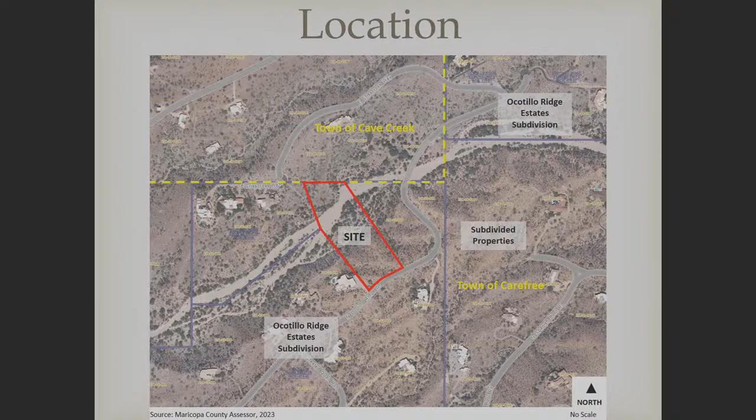So as you can see, this is in our Highlands area, Ocotillo Ridge Estates. You can see the property actually borders the town of Carefree, sorry, the town of Cave Creek is in Carefree. As you can see, a major feature on the property is the floodway, and you can see it has a bit of a floodplain to it. It occupies, I would say, more than half the lot.

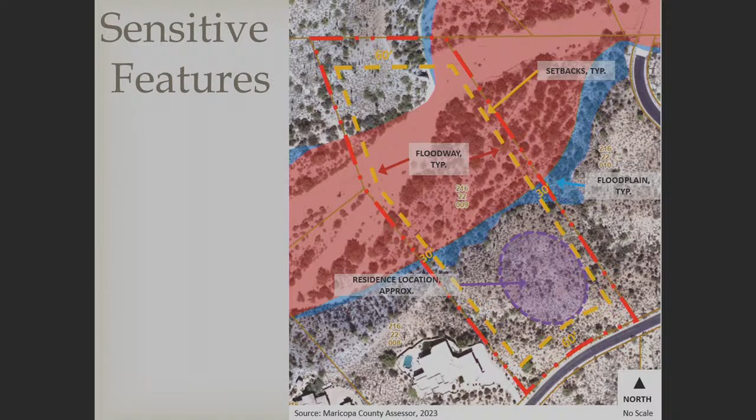You know, you see our setbacks. You can see I gave an approximate location of where the development will occur. It also ties to an existing plat, so it has a very specific location, which can sometimes be a challenge, but I think a lot of plats design those building envelopes understanding the developability of a property. So it coincides basically with our development standards.

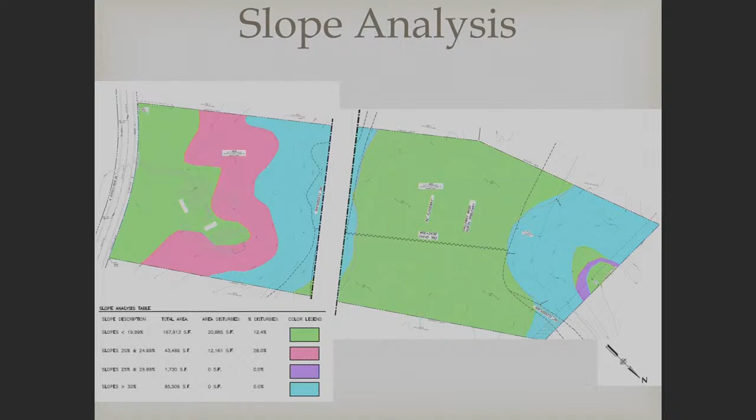So this is, as you can see, the slope analysis. The most level portion of the property to develop on is up close to the street where the building envelope exists, and then it sort of drops off down to the wash area.

Regarding our development standards, of course I wrote rural 70, it's rural 190. The lot coverage meets the requirement, less than half. The disturbed area, again, probably due to the fact that there is a significant wash, we're only looking to develop 11.8% of the property, which also includes the septic area.

Complies with our setbacks, as I mentioned, both zoning and plat. The cumulative height, I think because this home is sort of a low profile design, and probably also because it's on a relatively narrow, level area of the property, our cumulative height requirement is 27, almost 28 feet, with an overall building height of a little more than 17 feet.

All of our grading and drainage, which is reviewed by our town engineer, meets our development standards, specifically the cut to fill ratio. And utilities, we can say hooray, it's served by Carefree Water today, and as I mentioned, a private septic system will be on site.

Understanding our development review board purview, architecturally speaking, it's desert hues. Again, the low profile architectural style is in harmony with the intent of the zoning ordinance. There will be native landscaping and revegetation at the disturbed areas, and this falls into our mountainside review based on the fact that there is a significant wash with steep slopes, and it also has our protected vegetation.

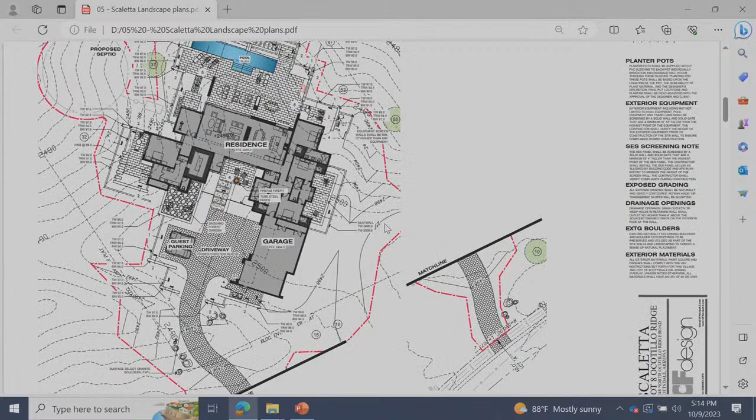Chairman: Can I ask, what is the red line around the site? That's the building envelope, the limits of construction, the total limits of construction. The building envelope seems to be a black dashed line. Right. So the plat building envelope is the black dashed line, and the limits of construction is the red.

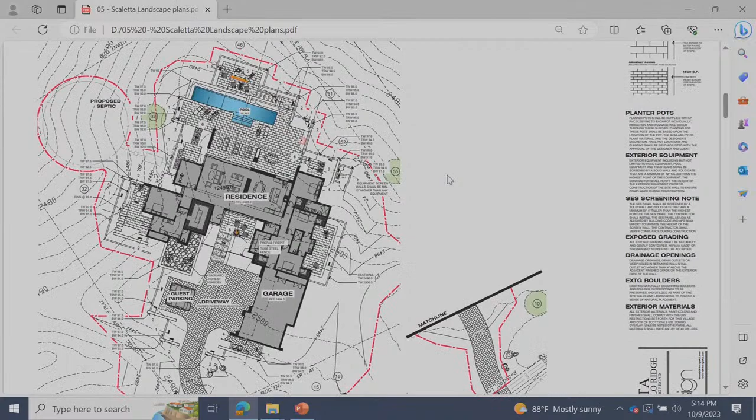And the only reason it's coming out so far is because we need to do a little bit of grading in order to get water around the house. Question: Just a quick question about the floodplain, none of the residence is in the floodplain? No, none of the residence is in the floodplain.

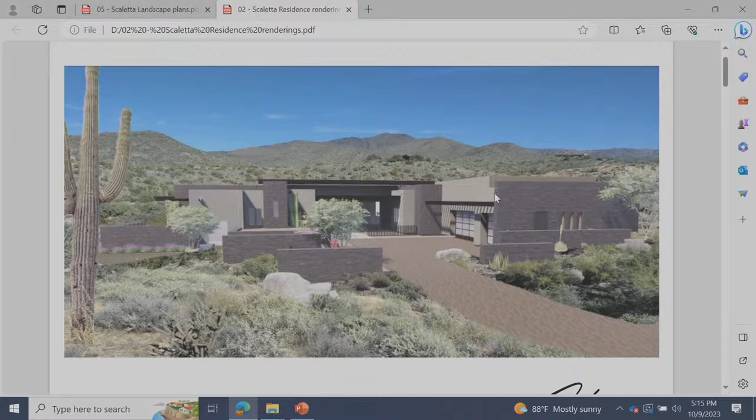I'd like to pull up the renderings. So as you can see, we're going with desert contemporary, natural stone and stucco, darker stone, kind of a warm gray stucco color with metal trim and detailing, and deep patio overhangs.

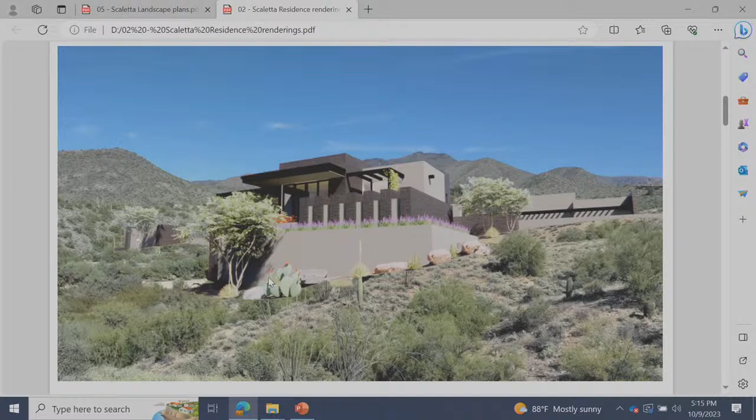This is where we have the most exposure, on the master suite side, and we're using some trellising walls in order to step down and not have those walls feel very massive.

Again, just trying to keep going with the land and terrace very gently. So you probably won't be able to really see the house wall from the street because of the screening desert landscaping, but if you could, this would be the view as you are driving west, with the garage here and the stone wall.

That's an awful large Ocotillo, I guess. My Photoshop just would not reduce it. I tried, that's like 100 feet tall. Yeah, pretty healthy looking. I tried to get it down, it didn't work.

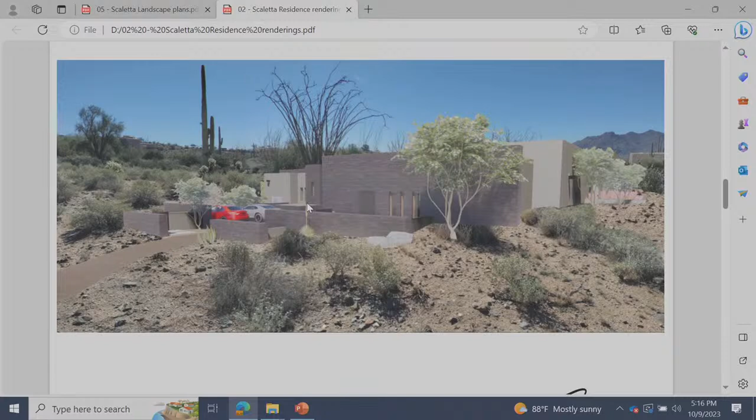The view, aerial view now from the southwest corner of the house. So master suite, master patio, stone screening walls, and the terraced wall stepping down. And the land slopes up pretty steeply up to here.

And then we have the auto court, which is down actually from natural elevation at this point, about 5 feet. We'll be reducing it in order to, again, maintain that low profile, keep our even cut fill, because we don't want to perch too high.

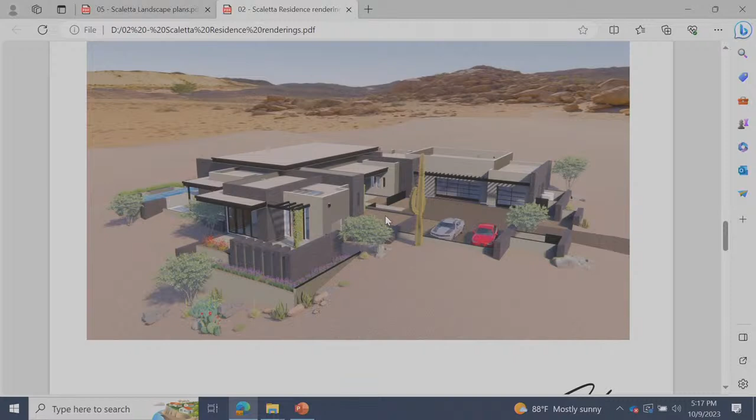If we come in on natural grade, we're going to perch too high on the other end, which we definitely do not want to do. So master suite, you can see the garages from here.

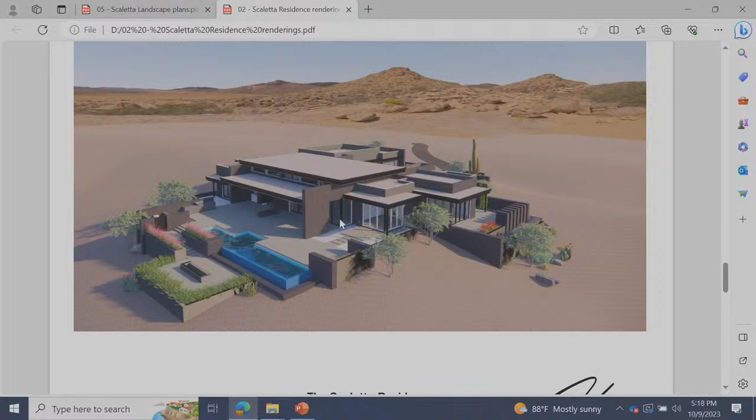Over on this side, we're now looking from the southwest side, or the northwest side, excuse me. Exercise room and patio, master suite, family room. You can see again the really large overhangs providing shade to all that glass.

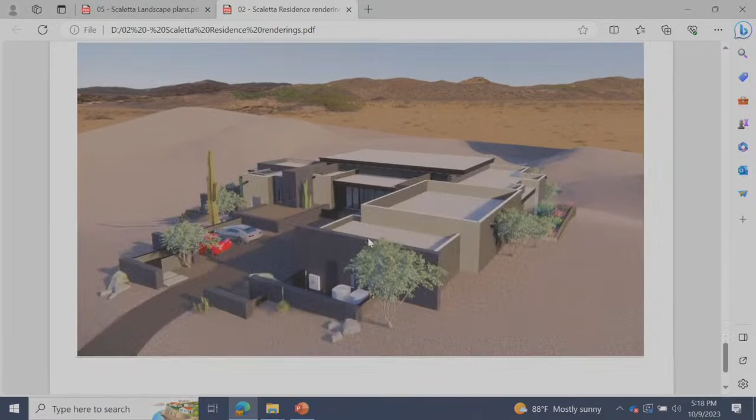Coming around, this view offers you a good view of how the patios are going to work for the backyard. And if I'm going too fast, just ask me to back up, please. And then the garage side, so this is the guest wing.

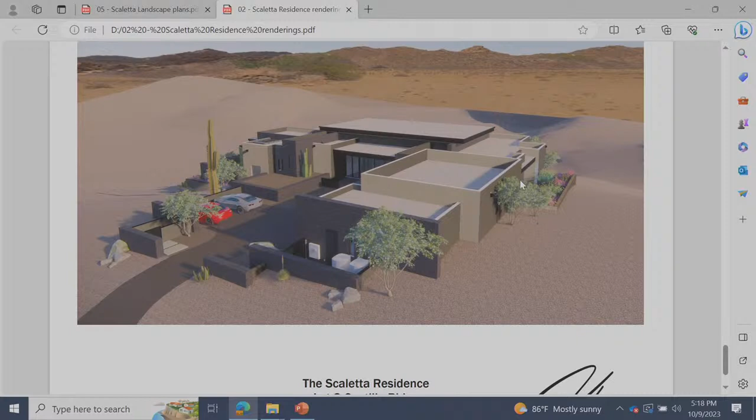On this side, because we're high on this side, there's like that little peninsula of high land that comes out on the topography. We are dug in, so we do have a courtyard here for that back patio, or for those 2 bedrooms.

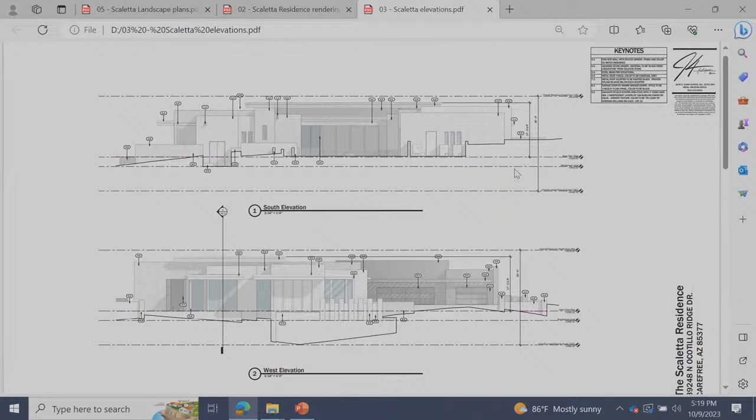Let's see here. Elevations. So here's our overall lowest natural grade. We're about 30 feet to our overall maximum height. Or there's our 30-foot overall maximum height.

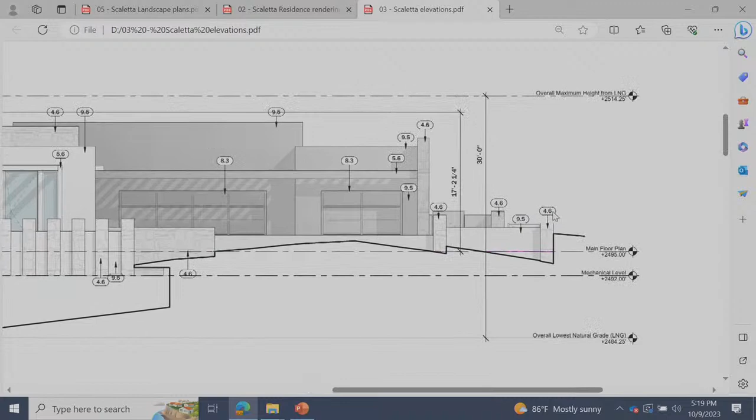Again, large glass, but lots and lots of covered patio, shade structure.

So I think that covers everything for the house itself. Is there any questions that I can answer? Not really, it's done well. I walked that lot this morning, so this will be a little challenge building at the same time.

Well, we got a great contractor on board. Interesting, you know what I mean? Yeah, been there, just done a house on a flat lot. Too easy, that's no fun. True, but you gotta play with the big equipment, that's what makes it fun, you know?

I'm glad you blew up those sketches, because trying to read them in a presentation, you need a magnifying glass to read all that stuff. Yeah, so I think we're pretty much squared away.

Everything's there, it is beautiful. Great, thank you. Your attention to detail is amazing. Yes, we were commenting about that earlier. Absolutely, thank you so much. That makes the detail so much easier.

When it's drawn on 8.5 by 11, you can't read it. Thank God we have this here. I know we got our screen too, but just the fact that you talk about when you change the lights out, how to do that - I was like, who does that? How to do the trees, how to put fertilizer, the watering system - I was amazed. Our landscape designer is top notch. No kidding, very impressive.